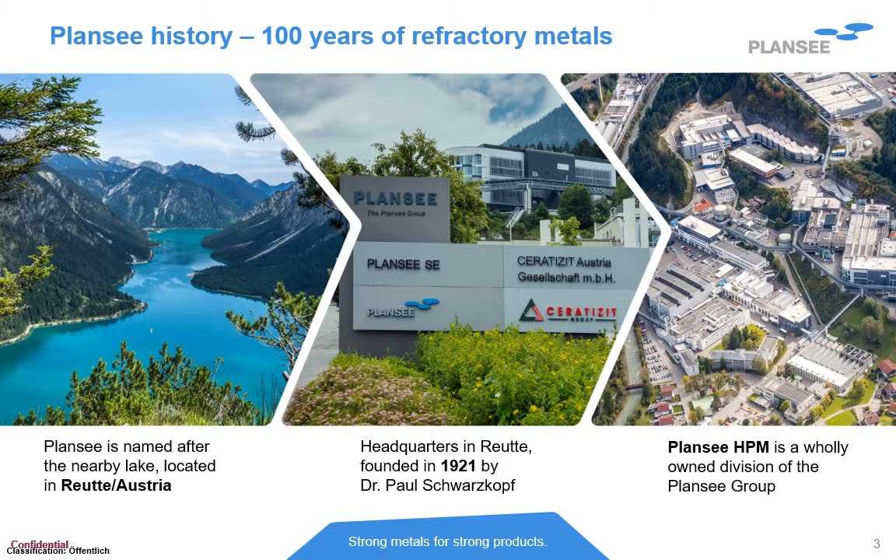This year is actually a very important and special year for Plansee because 100 years ago our headquarters was founded in Reutte, Austria, nearby the lake, which is also named Plansee. Plansee High Performance Materials is a wholly owned division of the Plansee Group, and Plansee currently is active worldwide.

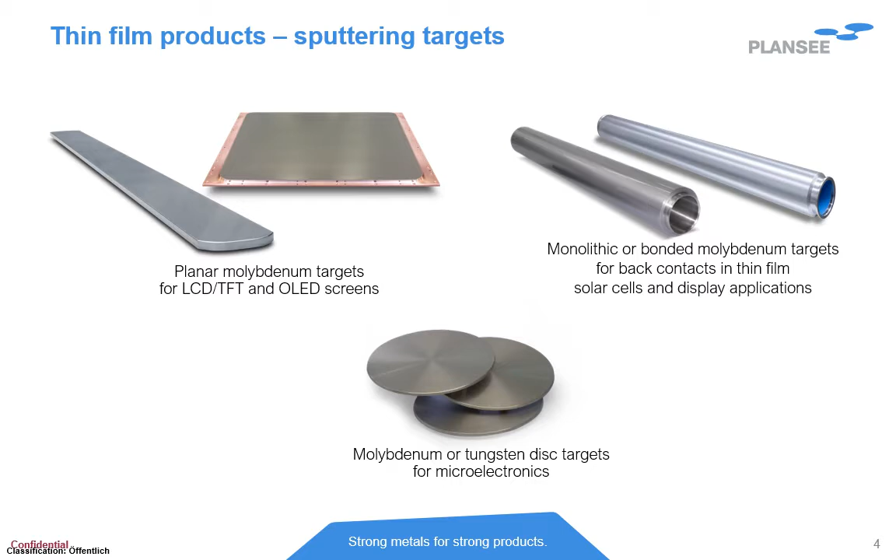Besides our, let's say, standard tungsten and molybdenum products, we are also producing different sizes and shapes of sputtering targets. We have planar sputtering targets, mainly used in LCD TFT or OLED production, and the size of these targets can become quite large. For rotary sputtering targets, we have also own production possibilities, and rotary sputtering targets can be used as monolithic targets or bonded targets. Some of the examples or applications is as back contacts in thin-film solar cells, but also for display applications. And of course, a very important and growing market is the microelectronic market, where we are also delivering molybdenum and tungsten disc targets for different wafer sizes.

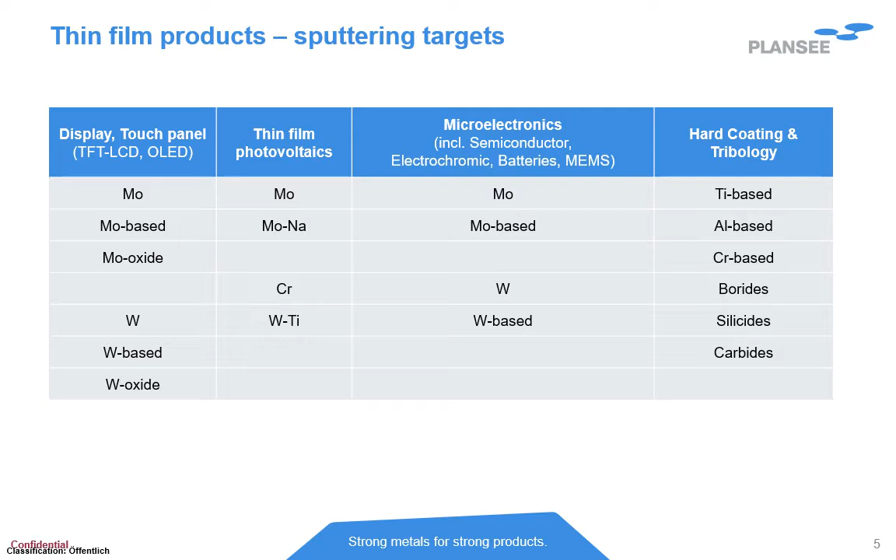Within the materials that we are producing as sputtering targets, there's a wide range of different possibilities. As you can see here, mainly of course tungsten and molybdenum based materials are dominating all of our applications, like for display, thin-film photovoltaics, but also microelectronics. But we also see an increasing number of alloys or compound materials, not only for hard coating and tribological applications, but those borides, silicides, but also carbides are a more and more interesting field of materials for different other applications.

The first technical topic I want to talk about is about low resistivity Mo thin films for electronic applications. This approach, what we have chosen here to reduce the resistivity of the molybdenum thin films, is a quite important one, as for novel display applications, low resistivity gate lines are required, especially when it comes to high resolution or flexible OLED displays.

If you could achieve it to have low resistivity gate lines within the thin film transistor structure, this would enable a lot of benefits, like higher conductivity if you want to, let's say, achieve a constant thin film thickness. But of course, you also could reduce the thin film thickness at a constant RS, which is in the other way important to reduce thin film stress, but which is also important to increase, for example, flexibility when you have bended substrate. And of course, you have a reduced line width at a constant RS.

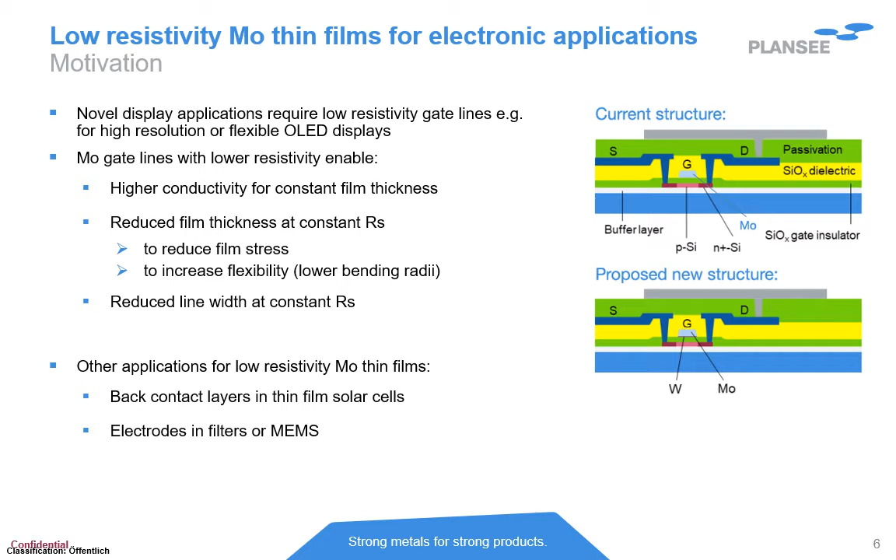This idea of having low resistivity Mo thin films is not only important for display applications, it also could have benefits for other applications like back contact materials in thin film solar cells, but also a very increasing, let's say, application as electrodes in filters or MEMS applications.

By depositing a tungsten seed layer, for example, under a sputtered molybdenum thin film, it is possible to have a reduction of nearly 30% in thin film resistivity. This is possible because this thin film seed layer, which can have a thickness of about 10 nanometers, for example, is strongly influencing the microstructure and domain size of the top molybdenum film, which results in a very strong increased conductivity of this molybdenum thin film.

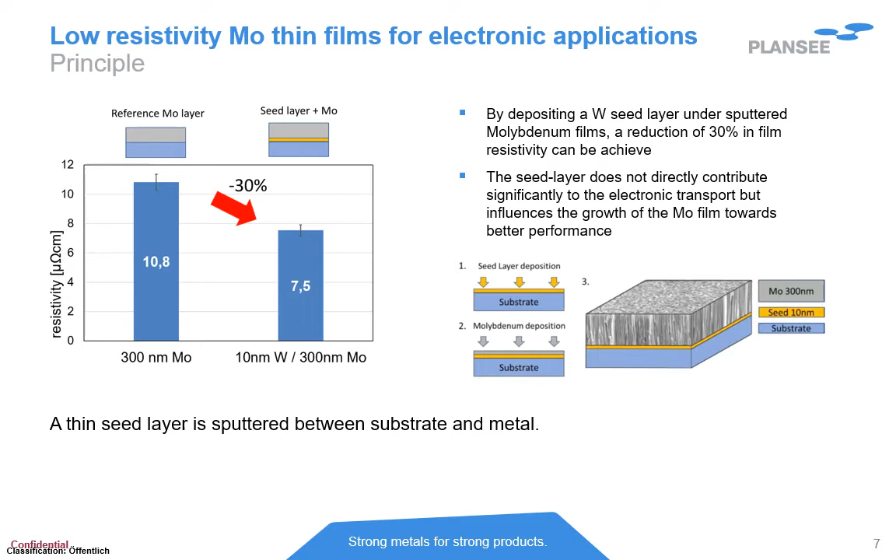The idea of that approach has been described already about 20 years ago for tungsten titanium films for microelectronic applications, but here the first time it could be shown that it also worked for pure molybdenum thin films by applying such thin tungsten seed layers below the molybdenum layer. This effect can be increased even with increased temperature. So 30% reduction in resistivity is possible at room temperature. The same effect can be achieved but on lower absolute values when you increase the substrate temperature during deposition.

On these graphs here, you see the influence of different substrate temperatures ranging from room temperature to nearly 200 degrees Celsius. And what you also can see is that the difference in the resistivity for all of those different substrate temperatures between a single layer Mo film and the approach where you're using a tungsten seed layer is more or less in the same range. So there's always a gain of about 30% in resistivity possible when you are using the seed layer.

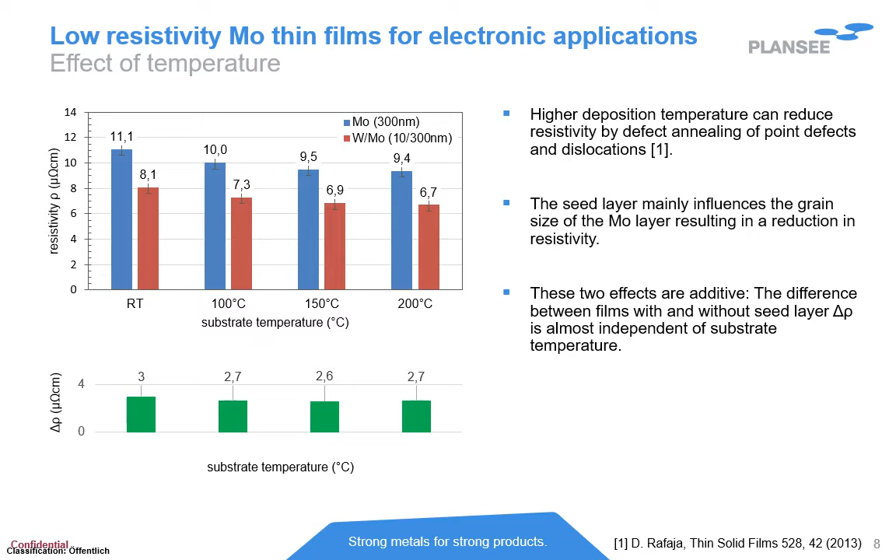Another group of materials I want to cover in my talk today are molybdenum oxides. Molybdenum oxides are a very special group of materials with a broad range of different properties depending on the oxygen content. On this graph here, you see some general information on optical properties as well as on the electrical resistivity. For pure molybdenum on the left side, for example, the optical reflectivity is the highest and the electrical resistivity is very low due to the metallic character of this material.

If you're increasing the oxygen content, you will get more and more properties from the oxide range, which are high electrical resistivity up to completely insulating for MoO3, and also the optical properties are changing a lot. For example, if you have a composition between MoO2 and MoO3, you can achieve that the oxide thin films are highly absorbing, which makes them interesting for anti-reflective coatings. If you're going to the MoO3 stoichiometry, those thin films are highly transparent, for which other applications are interesting.

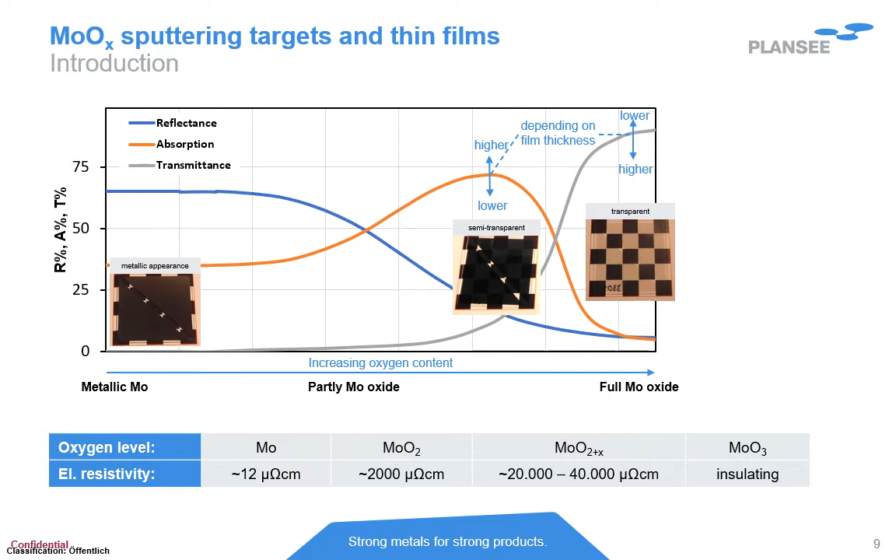Due to that broad range of different properties, these molybdenum oxide layers can be used in different applications. The dark oxide layers, for example, sputtered in a non-reactive process using molybdenum oxide ceramic sputtering targets, can be used as anti-reflective coatings for metal lines in high-end display applications. Also, electrochromic layers can be sputtered from this material, and molybdenum oxides are also an interesting material in solar absorbing layers.

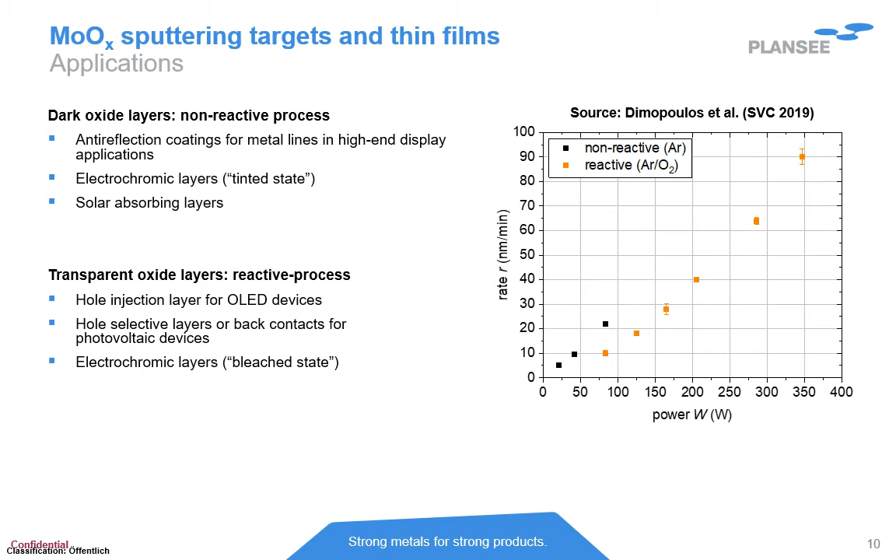If you want to use transparent oxide layers, you can use a reactive sputtering process, and those transparent oxide layers are interesting as hole injection layers for OLED devices, can be used as hole selective layers or back contacts for photovoltaic devices, and also as electrochromic layers. On the right chart here, you see an overview of the deposition rate for non-reactive and reactive sputtering processes using a ceramic oxide sputtering target. These results have already been published a couple of years ago, also at SVC.

For depositing thin films of molybdenum oxides, there are two possibilities. The one is reactive deposition, using a metallic molybdenum target or a ceramic molybdenum oxide target and adding oxygen in the sputtering gas, which is quite interesting if you want to change the stoichiometry of those thin films in a broader range, but maybe it's more difficult on large area as you really have to achieve a very good control of the oxygen distribution in the sputtering chamber.

Another option is non-reactive deposition. Here you have the advantage that you do not have to add oxygen in the sputtering gas, but you have to use a ceramic molybdenum oxide target. Those molybdenum oxide targets are currently available in different compositions with different oxygen contents.

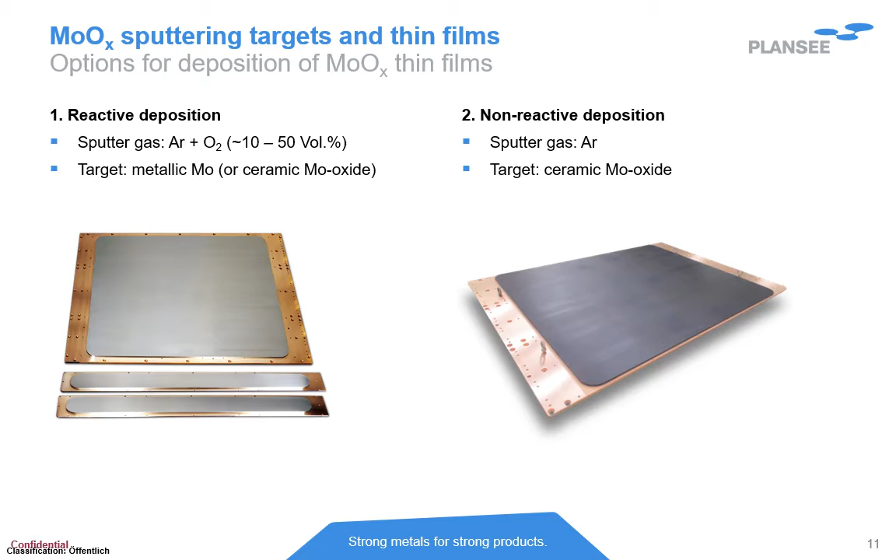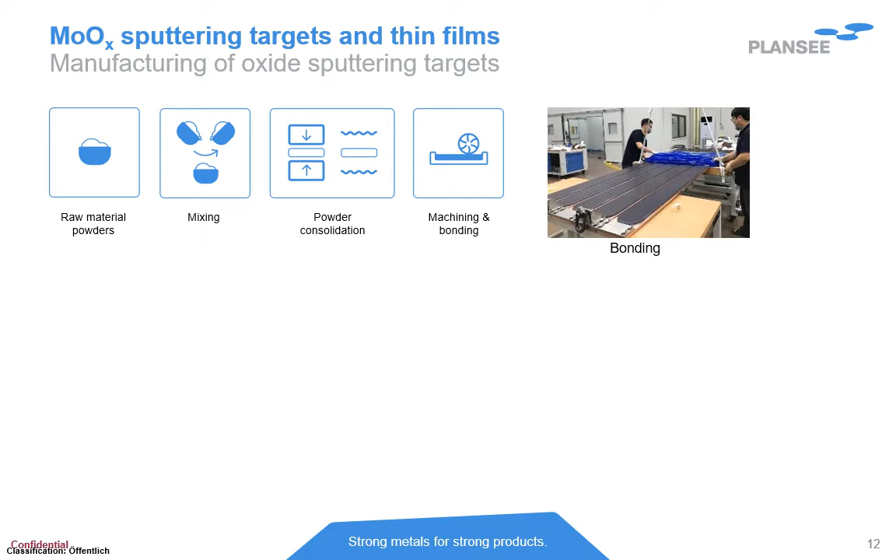Our production process for producing such molybdenum oxide sputtering targets is based on powder metallurgy. That means we are using different oxide powders, maybe also adding metal powders, mix them, and are using high temperature powder consolidation to achieve high density and good microstructure of that material. In general, for most of the applications, those consolidated targets are then additionally machined and need to be solder bonded on a backing plate.

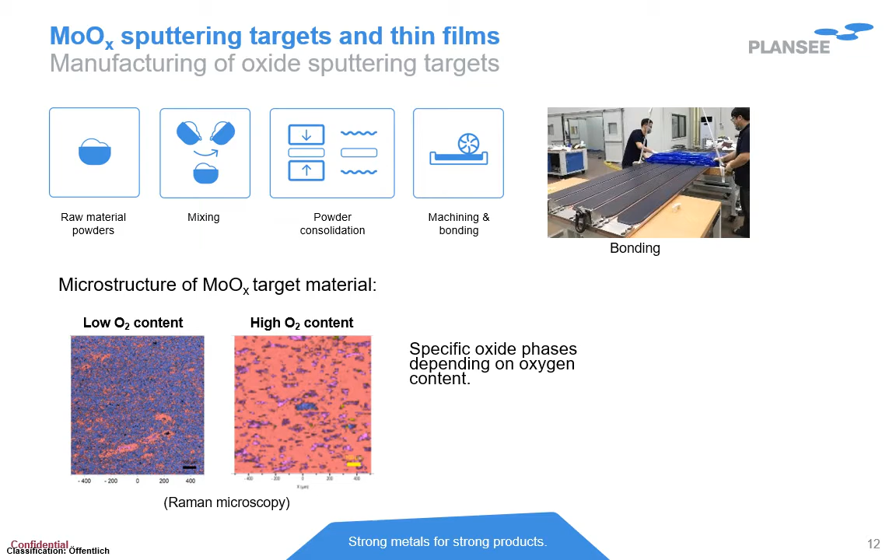The microstructure of such a molybdenum oxide target material depends on the oxygen content. Depending on the oxygen content, there are different fractional areas of oxide phases in the material, which makes it possible to tune the properties of those target materials. So for example, electrical conductivity, thermal conductivity, but also fracture strength of those materials strongly depend on the oxygen content. And by using powder metallurgy, it is more or less possible to achieve the one or other properties depending on the final application.

An important factor for using those molybdenum oxide thin films is the chemical stability. That chemical stability depends on the oxygen content. And a very interesting thing is that you can improve that chemical stability for different water-based or non-water-based solutions by adding dopants into the molybdenum oxide. Those dopants can be, for example, other metals. It can be other oxides that you can mix or bring into the microstructure of that material.

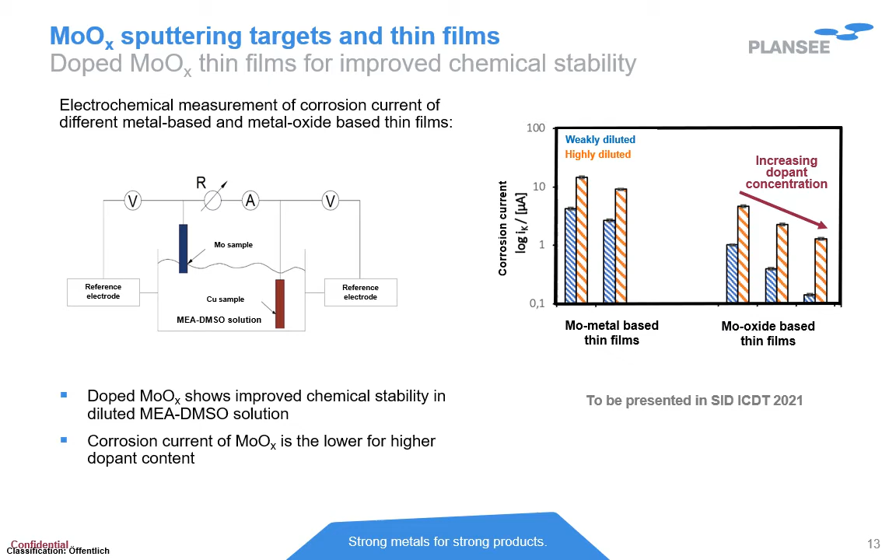This can be measured in an electrochemical cell, and you clearly see here on this slide that by adding different dopants, the chemical stability, expressed by the corrosion current, can be strongly improved for several molybdenum oxides. More results on this will be presented later this year at different conferences.

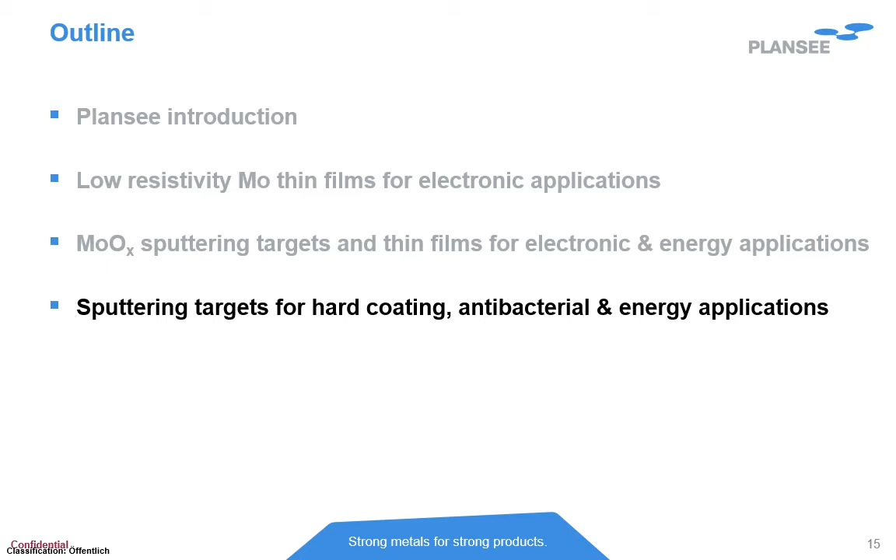The best way to deposit titanium nitride is sputtering in reactive nitrogen-containing plasma. Another possibility is to use ceramic titanium nitride targets in pure argon plasma. Let us study the idea of the following experiment. In the work of Rainer Hahn from Vienna University, titanium boron nitride was deposited in the first trial using titanium and titanium diboride targets in reactive nitrogen-containing plasma. In the second experiment, the titanium boron nitride coating was deposited in pure argon using titanium, titanium diboride, and titanium nitride targets.

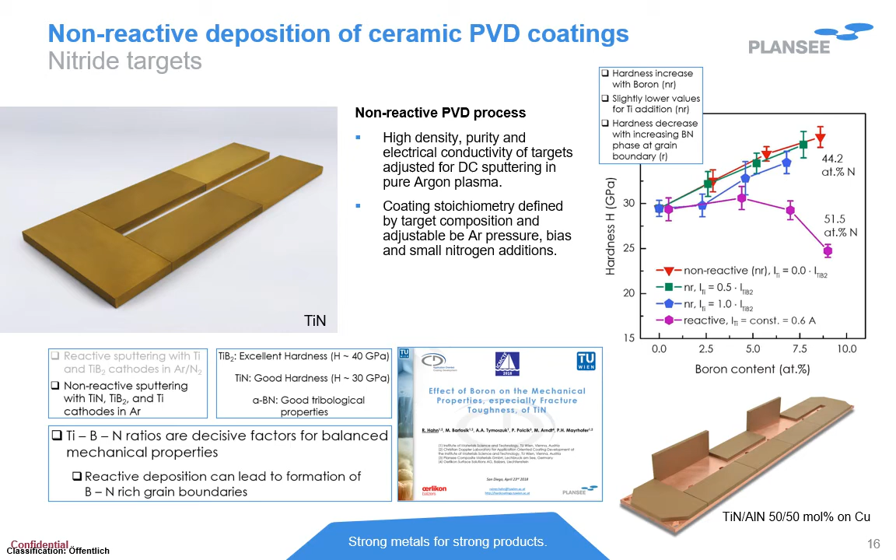The titanium nitride aluminum nitride target shown in the picture on the right side will maybe open some doors for new ideas. The next example is related to titanium carbide coatings deposited in non-reactive mode directly from ceramic titanium carbide targets, without any carbon-containing gases. In this work published by Michael Stüber, titanium carbide targets enriched with additional graphite powder were used for deposition of nanocrystalline titanium carbide particles in an amorphous carbon phase.

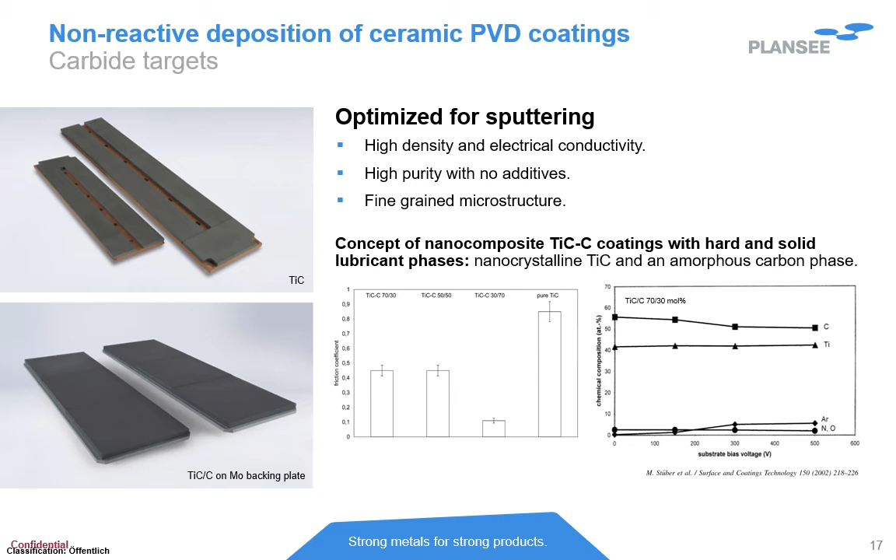By changing the ratio between titanium and carbon in the target itself, it was possible to deposit coatings with different values of friction coefficients. This is shown in the diagram on the left side. In the diagram on the right side, it is shown how the amount of carbon in the coating can be triggered by changing the bias for a constant target composition.

The next possibility to work in non-reactive mode is related to the deposition of diborides for hard coating and wear-resistant applications. Our work related to the hot pressing technology makes it possible to manufacture a big variety of diborides shown on the left side. Most of them are dedicated to sputtering, but some papers were published already for applications in arc evaporation.

The question is, why explore ternary diborides? I think these materials have big potential for certain applications as they show a huge range of interesting properties. For instance, magnesium diboride is a superconductive material up to about 40 Kelvin. Rhenium diboride is known to be the most incompressible material. Titanium diboride is well known and established because of high hardness and not too bad thermal stability. Many researchers are working on these materials already, discovering new possibilities and maybe also new application fields.

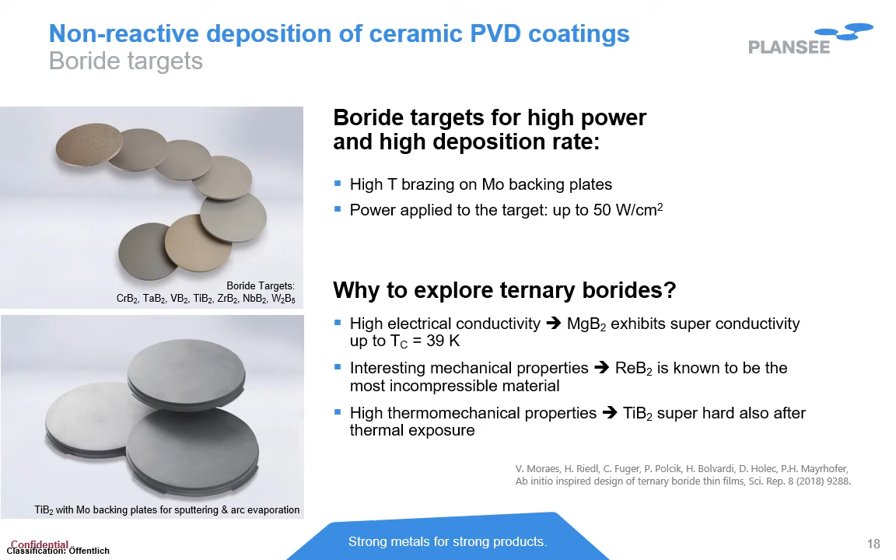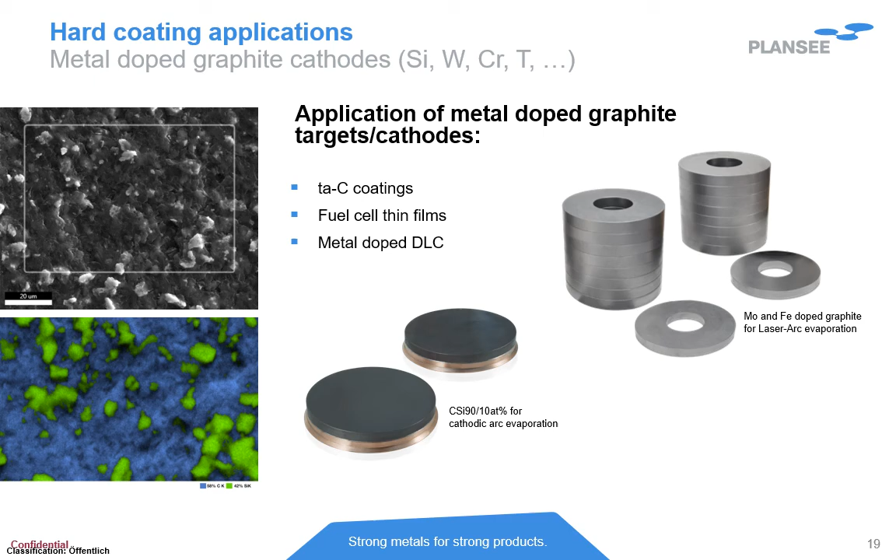If you look at the diagram on the right side, you can follow the decrease of L value, these are the gray dots, with increased copper content in the coating. At the same time, A value, standing for red, is increasing and the blue B value is decreasing. A very simple approach supported by application of powder metallurgically produced targets.

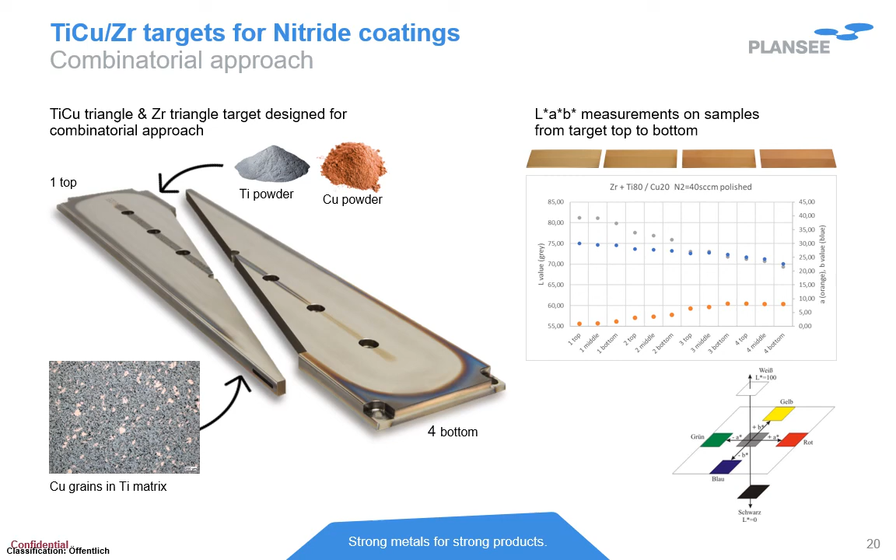The next and last example is also related to powder metallurgical production of targets with flexible compositions. In the last few months, we have been facing strong demand for targets containing small amounts of copper or silver. These elements are well known for antibacterial behavior. The direct alloying of targets with these elements seems to be the simplest way for deposition of antibacterial surfaces.

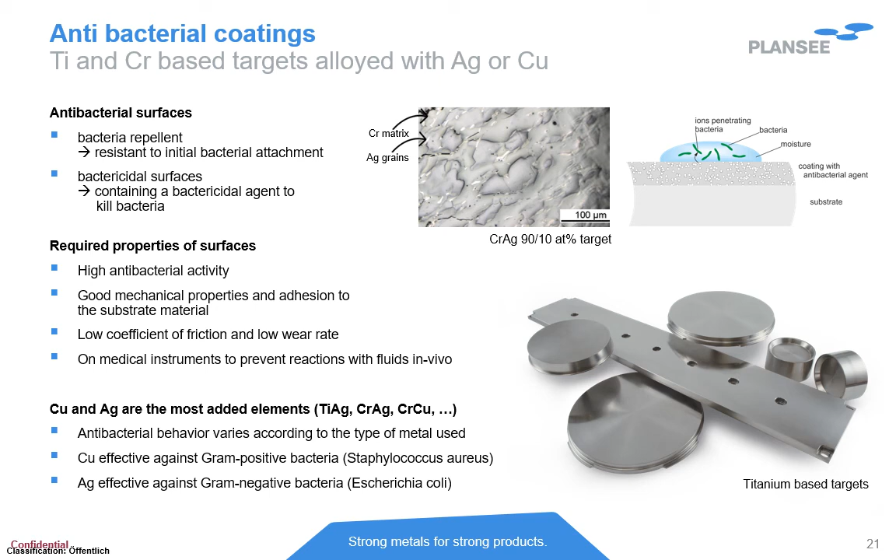In this case, you are not forced to work with co-sputtering. You can guarantee a uniform coating composition, and you can work in your PVD system with high deposition rate. In most cases, such coatings are deposited in a reactive mode for nitrides, having not only high wear resistance, but also being active against bacteria.